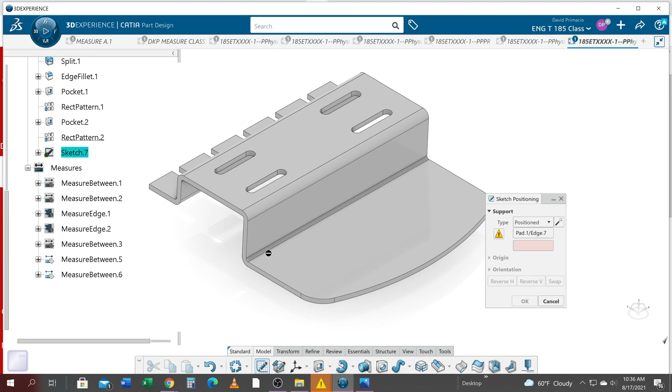So I want to do a hole coming from this edge and this edge over here on the inside. Now I could go to the outside edge where they come from, but it'd be really weird to do that.

Actually, it didn't even look like that. Let me do that again. I could go to hole, and I could go from here to here, but I'm not really given a measurement from that.

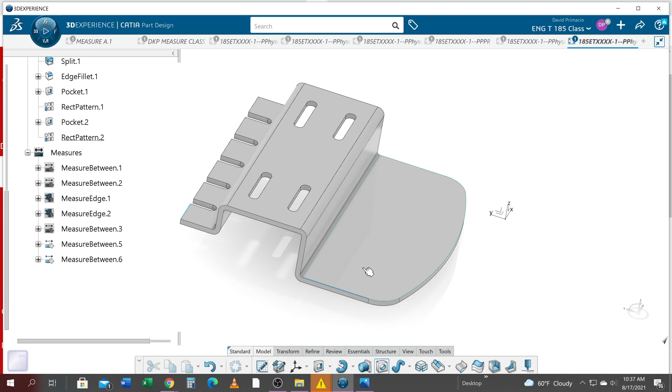So what I could try and do is go back to hole, restart this. This edge I know where I want to come from. I missed, you got the surface. Under hole, I want to grab this edge. Make sure you grab the edge, and I'm going to grab this edge over here, and I'm going to try and grab this surface. See how it was able to project down to that surface?

Now, why I picked that is if you look at the directions they gave me, I know 2 inches and 4 inches to here gets me to that front surface, and then another inch will get me there because I got to subtract the 1/4 inch.

So it's 2 plus 4 is 6, plus 1 more is 7. So I know that this number is 7 inches. And then they gave us this number of 1.5 inches.

And then they gave me a diameter of 1.5. Oh, or was it 1 1/4? I think it was 1 1/4. And then I'm going to change the blind hole to up to last so it goes all the way through.

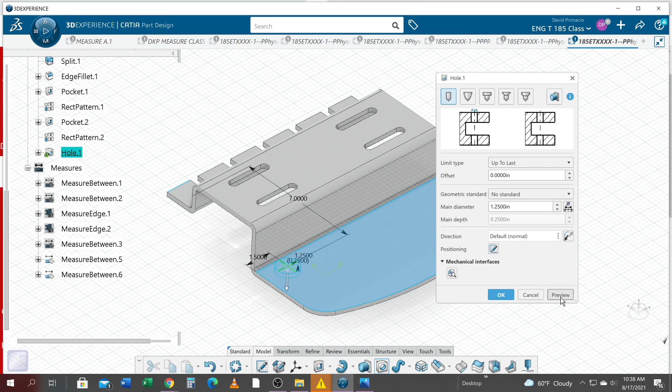Let's preview that, see what we got. That looks awfully close to that edge.

1.25. Okay, so I know what I did wrong here.

Hang on, my tea's boiling. I gotta pause the video and I'll be right back.

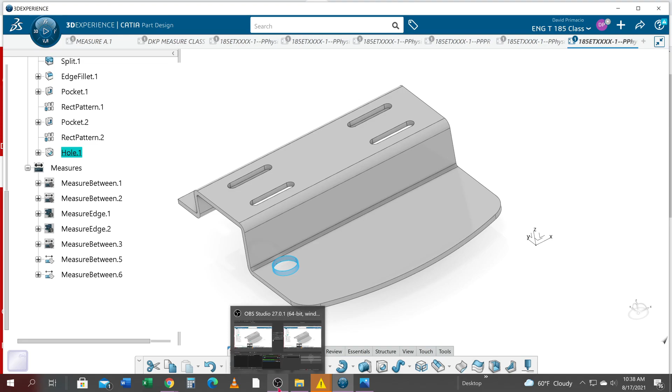I think it's recording. Okay, so if you recall, when I did the sketch, I just threw in a sketch and wasn't really paying attention to the exact numbers.

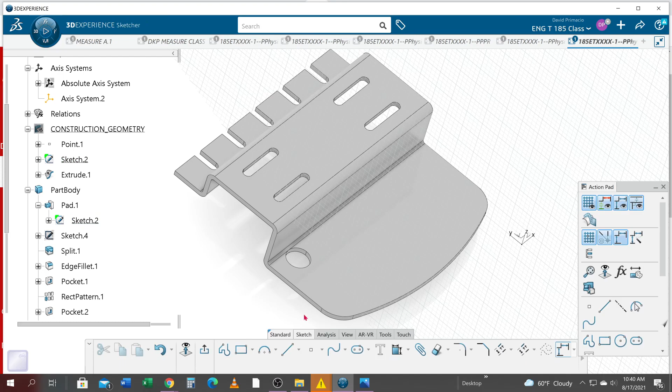Now it's coming back to bite me, so I'm gonna double click my sketch 2 and go normal to view.

Well, that's interesting. Where did all my constraints go?

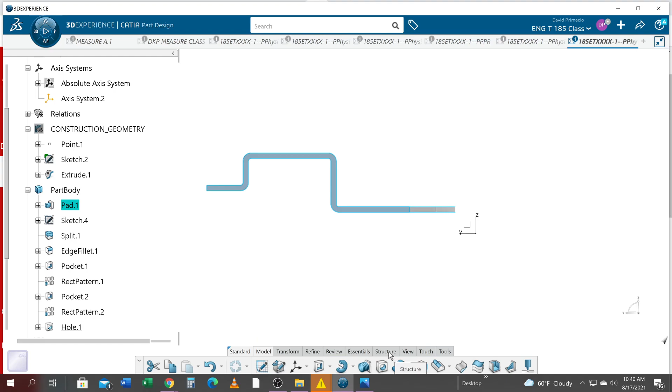Double clicking on my pad there, finally. Okay, so I just threw in a bunch of numbers over here. Let's hit the sketch and see what I'm supposed to be at.

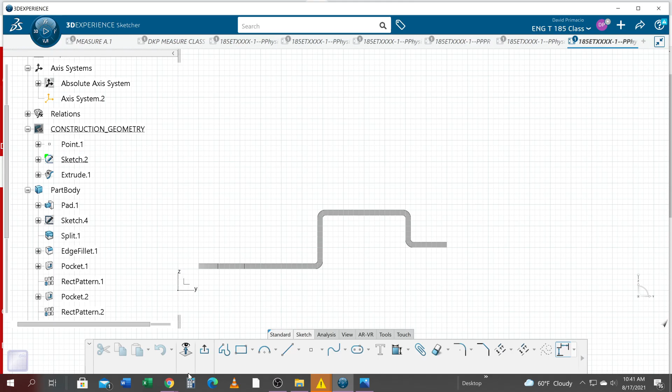Well, that's interesting. Why don't I see my numbers? Oh, see, this is why I told you earlier it's going to come back to bite you. You shouldn't really be leaving that sketch 2 in the geometrical set.

And I'm starting to have issues with that. I warned you not to do it, and I just continued on anyways, thinking I'm just doing it for a demo. Well, it's coming back to bite me. So let's see if I can narrow down here where I've gone wrong.

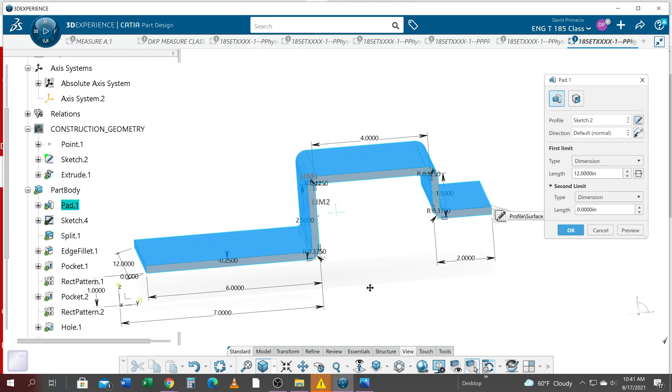I've got 4 inches from the inside here, and it needs to be 4 inches from the outside. So this dimension here needs to be 3.5 inches.

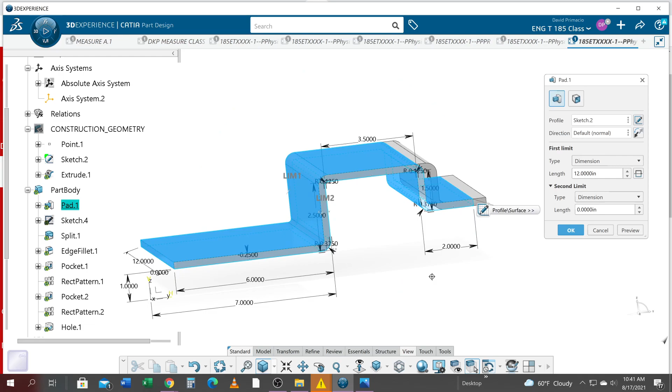And then looking at the picture, so outside to outside is 4 inches. From here to here is 2 inches.

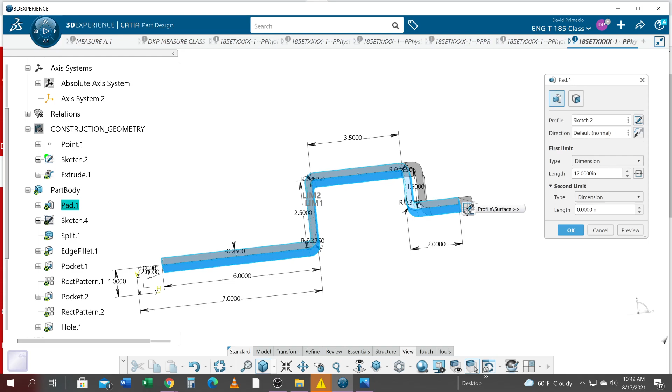And I got it going from the inside to this edge. They have it going to the inside, so I got to change this to 1 3/4.

And then their 6-inch dimension, well, it's going to be 7 inches overall.

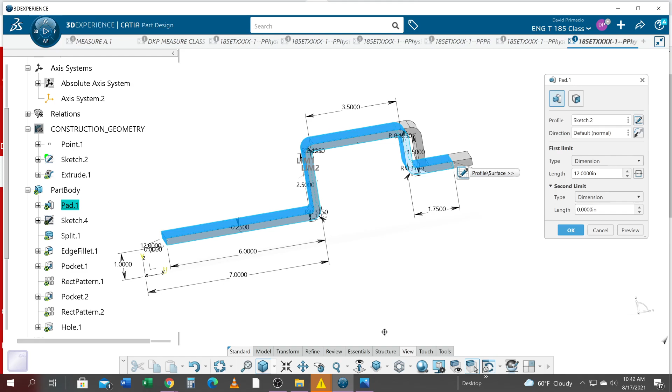So what I will do here is put on a constraint. Oh God, I can't even do it. This is 3.5. Let's just say okay.

Let's see what it looks like here.

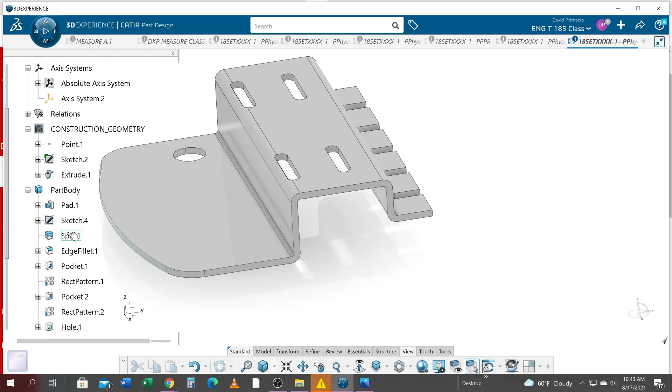I'm going to find my first pocket, double click the pocket. Oh, not that one, sorry. Those slots should be fine. This pocket over here, I'm going to move the second pocket. I'll double click on that, and I'm going to change this 3 inches

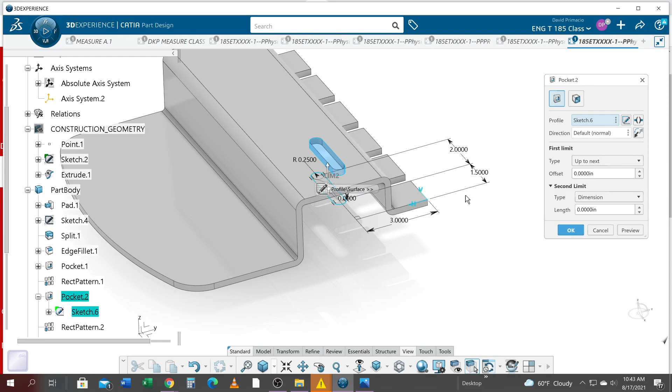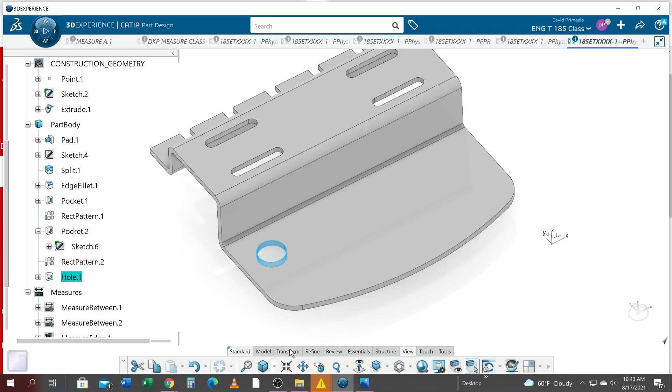to 2.5, so I can proceed on here with the main part of the demo, which is how to put this hole in. So I have that hole in. Once I've made the modifications, it gave me more distance, and you simply select the last hole and do a rectangular pattern. I wouldn't create a new hole. It'd be more logical to do a pattern. That way, if you want to change the spacing and make modifications like you saw me do, it's not a problem. So we'll go to transform, rectangular pattern,

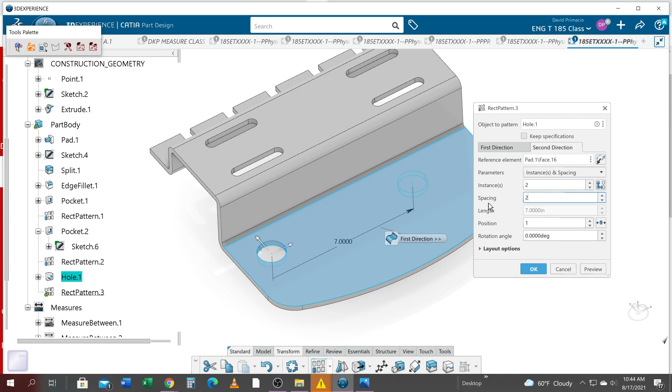and for a direction, I'm going to try and grab reference element. I got to highlight the reference element for a direction. I'm going to go along this line. And 0 or just 1, and then reverse the arrow here, and that one is supposed to be for the second direction 2 inches. Preview that. We'll select OK, and that's how we got these 2 holes in.

So I'm going to do the same technique, hopefully, to get the last grouping of holes. So we know it's 5.5 inches for this off of this left side. We know it's in line with this hole here. So I'm going to practice the same technique. I'm going to go back to the model command and create a hole. Again, I know this edge. This is the edge that makes sense to me, so I grab that one.

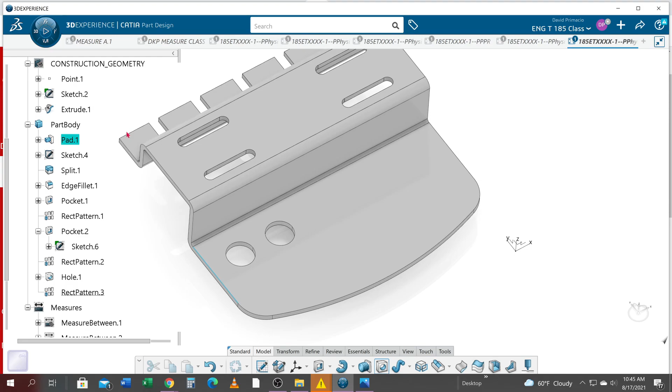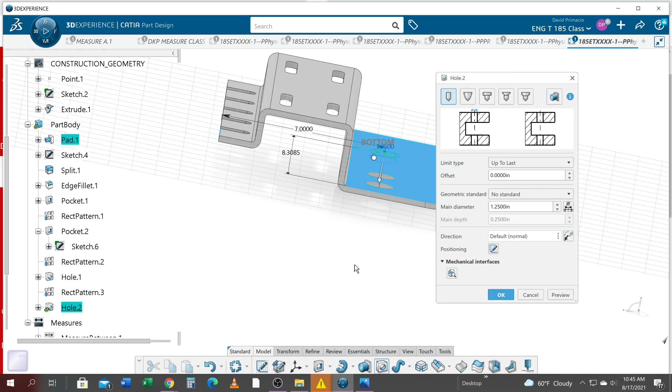Now, the reason why it got that is I grabbed the surface and not the edge. So I'm going to make sure I'm grabbing just the edge, and then I'm going to grab the edge over here on the top, which, if you remember, isn't even on the same plane. But it's okay, because when I click over here, it's just going to do that perfect for me and project it to that surface because I've clicked on that surface to link to. Let's go 7 inches in this direction, and then this first hole was 5.5 inches,

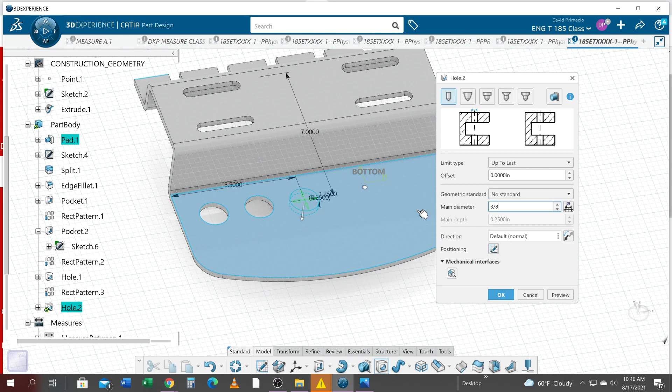Select OK. No, the size of the hole is 3/8 of an inch. 0.375 is 3/8 of an inch. So this should be 1¼ over, that's from the inside wall. That's 3, 5. Sorry, 2, 4. That's 6 plus another inch, 7. And this was 5.5 and a 3/8 inch hole, which we will use up to last to go all the way through. 3/8 of an inch hole. Again, 3 divided by 8, and hit tab. It will calculate this 0.375 for you, and select OK.

With that hole highlighted, we can go right to transform tab and hit the rectangular pattern, grab the face. For a reference element direction, grab the face, and it will give you 2 directions. I will inverse both arrows and select my spacing, which appears to be 1 1/8 in this direction and 3/4 in this direction.

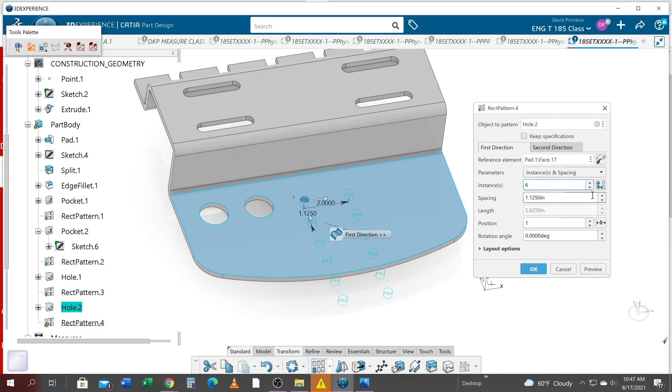So this direction is 1.125, or you could say 1 plus 1 divided by 8 and hit tab, and you get your 1/8 of an inch. We have a total of 5 holes, so I'm going to go 5 holes. Select OK. No, we're going to do second direction. We have 3 holes at a spacing of 3/4 of an inch. Preview that.

Oh, I did this the wrong way. Sorry, 1 1/8. And then this first direction is 3/4 of an inch. Preview that. What am I doing? We're going 5 this direction. Sorry, 3 this direction, and second direction I got to go 5. Preview that.

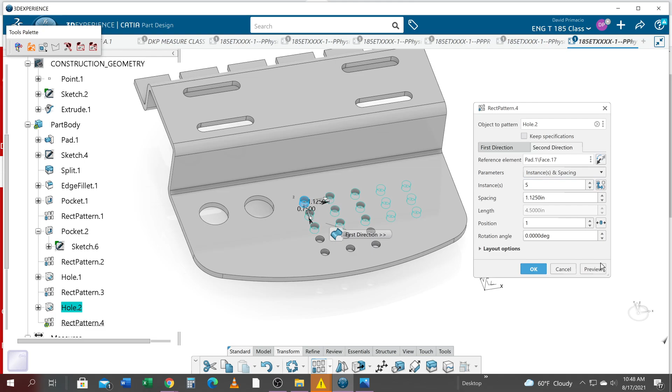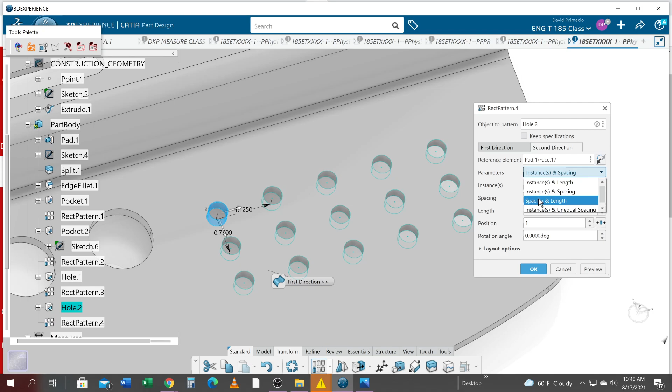Now, just for fun, I'm going to show you an additional trick. Am I going up to last? I hope I went up to last. It doesn't look like I did. So I'm going to have to go back and fix that. That's okay. I wanted to show you instance and unequal spacing. So if I wanted to, just for kicks, I'm going to have you do this. Right here, this one, I'm going to change that to 1 1/4 inches. And I'm going to change this one here to 1 1/4 inches.

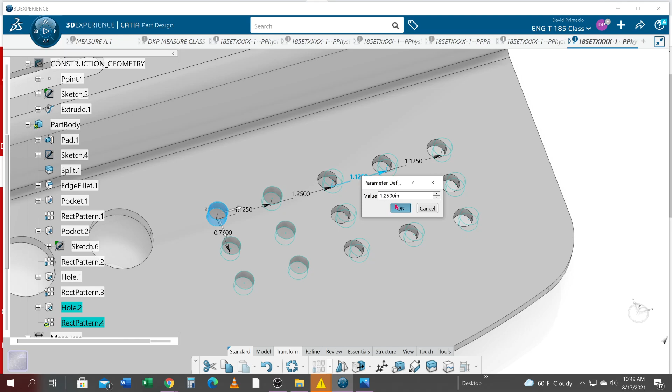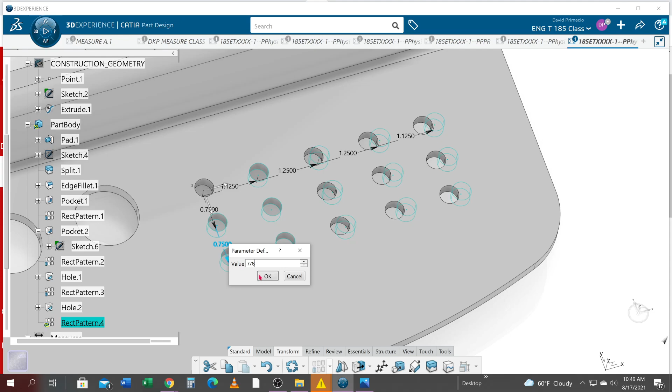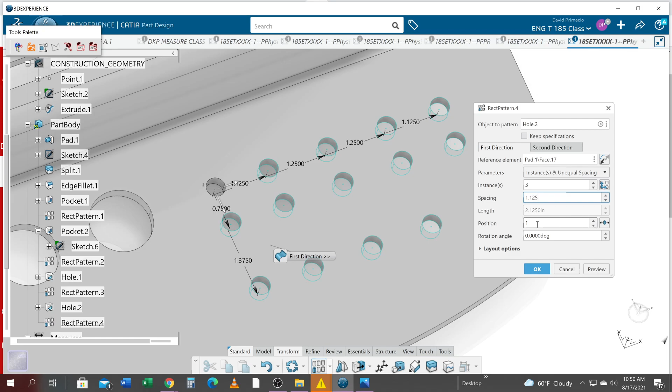Alright, and then for the next one here, I'm going to change that one to instance unequal, and I'll change this one to 7/8, which is 0.875. I can't really tell though. Let's go 1.375. See how weird that looks. I can't handle it. It's too weird looking. Let's go 1 1/8. Preview that. I'll select OK. I just want you to know that you can use rectangular patterns and have holes offset to different values.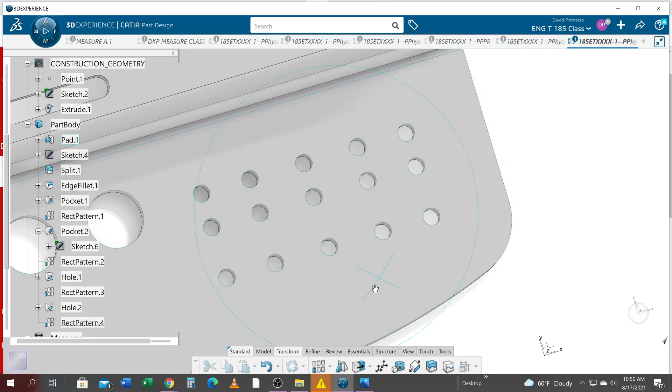Okay, this hole does not appear to be going through, so I double click that hole and just going up to last. Select OK. So I guess I just need to rotate it more. Yeah, it was just a shadow. Okay. I'll do that last pattern. Let's go back to 0.875. Select OK. Yeah, I think that's obvious enough.

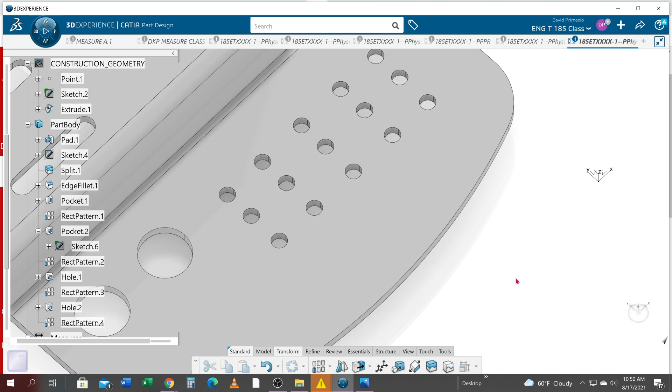Alright, this concludes my demo on this part, how I built this sheet metal bracket. When you come take the 194 class from me, I'm going to show you a lot easier way. We're going to use the sheet metal workbench to do this. But first things first, we're going to learn how to do it using the part design, get comfortable with the part design workbench in my basic class.

Hopefully this was some helpful tips. There's several ways you can do the same thing, and I had you do it your way on the first go around, which is great. You know how to do it, you did it your way. Now I want you to do this same part my way, using my techniques to try out my techniques. So you know everything I know by the time you're done with this, plus you know everything you know that I don't know. So you'll be twice as smart as me by the time you finish this demo. Okay, hopefully this video helps you out and you can complete this part and move on to the next exercise.